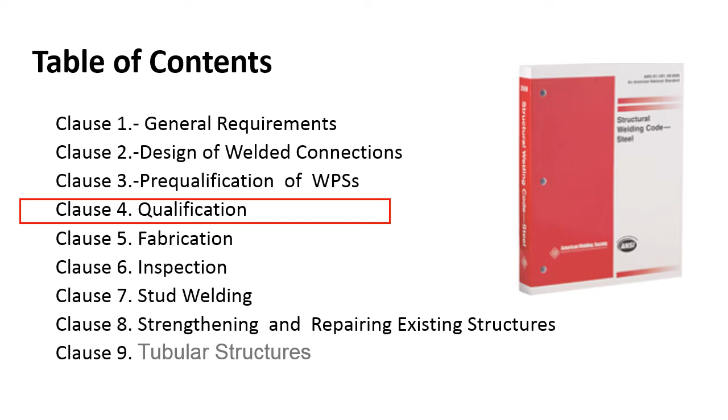Clause 4 is qualification, and this is the second part of it. We're going to keep slogging through qualification, covering WPS this time around, and some of the testing required and how to read some of the tables included in clause 4 for weld procedure qualification.

The PQR combines all the information of the WPS and adds the test results to provide a complete document that certifies the welding specification. It tells everybody what we did, how we did it, when we did it, the date, time, everything. This document is also required by all codes unless you are qualifying under the American Welding Society specifications. Under certain conditions, the WPS may be considered pre-qualified, in which the PQR is not required. So that's where we're headed in this episode.

In the next episode, we'll talk about needing a PQR. But right now we're talking about pre-qualification.

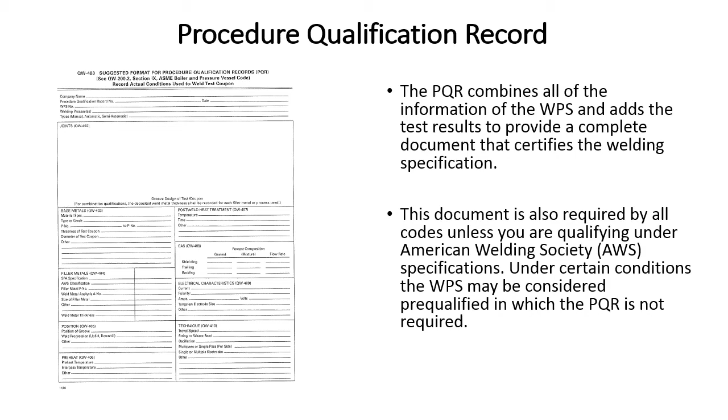If you like this format, you can use it. If you don't like this format, you can invent your own. Most codes have a suggested format, but if you've got one that you like, run with it.

I worked for a company years ago, and theirs was all written out. We did a lot of ASME work, American Society of Mechanical Engineers, so we just had everything typed out and addressed in paragraph form. Didn't look anything like this. It looked like a book report or something. But it worked, our clients liked it. Everything was addressed. We had a couple little sketches on there, maybe a table or two, but that's what it looked like. This is what a welding procedure specification looks like.

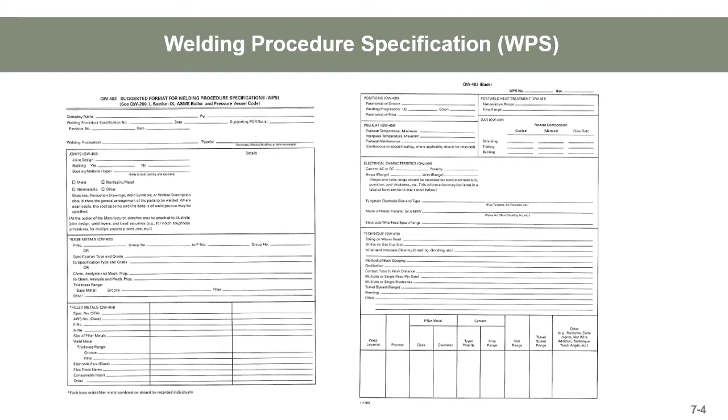Even though we're not going to be talking really about procedure qualification records in clause 3, you need to know what we're talking about so that you know what we're not talking about when we're not talking about it. So this is a procedure qualification record.

There's information there for bend tests, tensile tests, and then you put down all the information on the left-hand side: voltages, amperages, filler metals used, base metals, a sketch of the joint, whatever pertinent information you're going to need. Then you're going to take this, type it up, add your tensile test, your bend test, your toughness test, whatever is prescribed by that particular code, and then you're going to bundle that all up, give it a number, a PQR number, and that's what you're going to have.

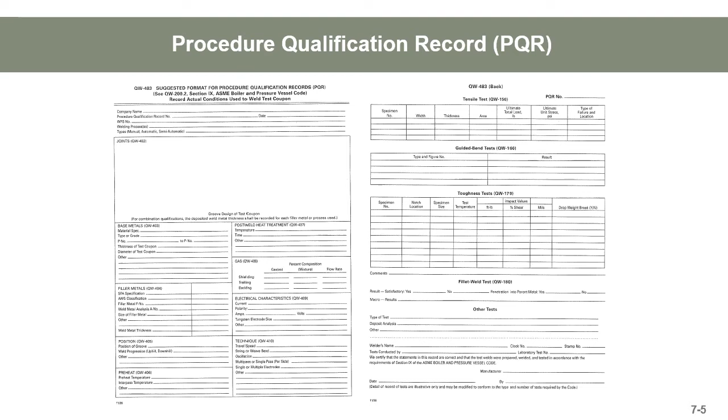That'll be your procedure qualification record that will support your welding procedure specification.

PQR content, what goes on a PQR? Generally, any supporting documentation: material specifications, electrode specifications, shielding gas specifications, all required testing, non-destructive and destructive. These tests typically include X-ray examinations, ultrasonic, tensile testing, bend testing, and when required, impact testing. All this stuff gets bundled up into a PQR.

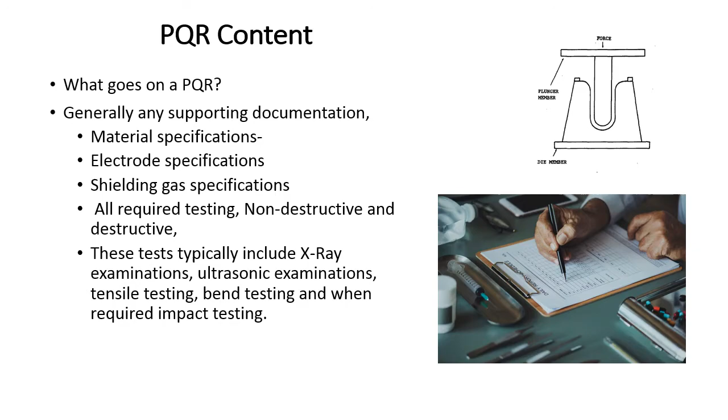Like anything we do with any of these codes, you need to realize there's a wall between welding procedure specification qualification, WPSs and PQRs. They're on one side of the wall. And on the other side of the wall, we've got performance qualification, which is qualifying the welder.

So right now we're going into Part B, which is Welding Procedure Specification Qualification, WPSs. We are not talking about qualification of people. We'll do that in the next edition of this podcast, YouTube video series, whatever we got going on here.

So we need to respect the wall. A lot of times a guy will be digging through Part C and say, oh my God, I got to do this for my WPSs. You got to respect the wall. You got to realize if you're dealing with the welding procedures, that's in one area of the code, Part B. Part C is performance. So just keep this in mind.

One of the basic tenets of these welding codes is we don't get on the other side of the wall. We stay in our swim lanes. If we're doing procedures, we do procedures. We don't dabble and read something out of the performance side or vice versa.

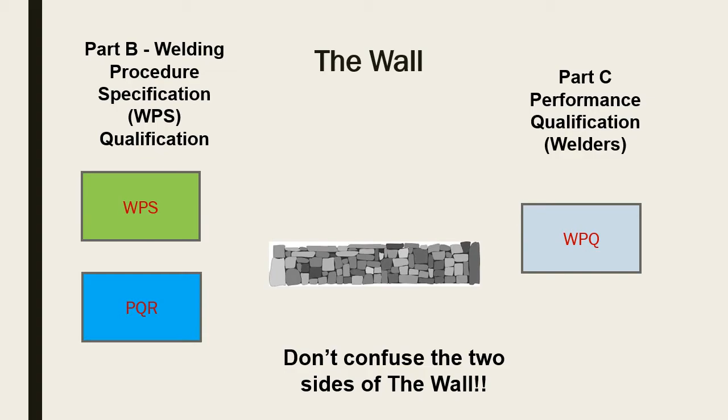Part B, Welding Procedure Specification, WPS Qualification.

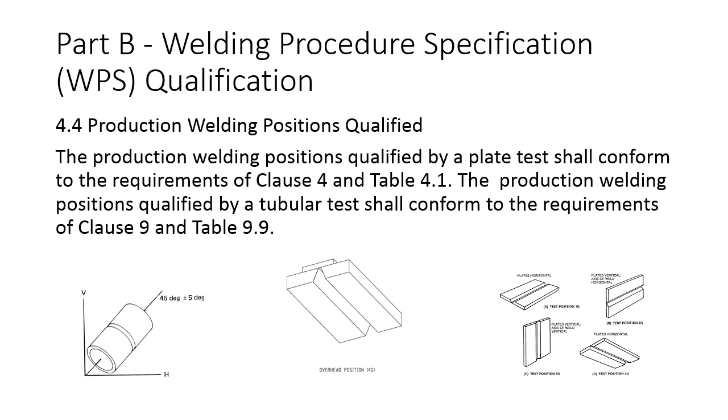4.4, Production Weld Positions Qualified. The production weld positions qualified by plate test shall conform to the requirements of Clause 4 and Table 4.1. The production welding positions qualified by tubular tests shall conform to the requirements of Clause 9 and Table 9.9.

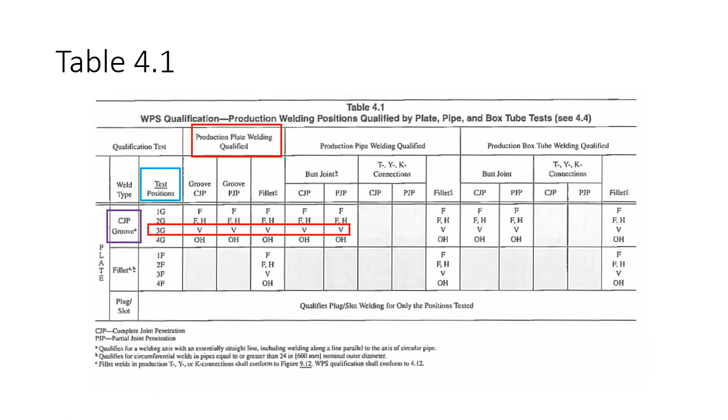4.5, types of qualification tests. The type and number of qualification tests required to qualify a WPS for a given thickness, diameter, or both shall conform to Table 4.2, complete joint penetration, Table 4.3, partial joint penetration, or Table 4.4, fillet.

Details on the individual NDT and mechanical test requirements are found in the following subclauses. So it's going to tell us to chase, if we're doing complete joint penetration, we've got to go to Table 4.2.

But each one of these subclauses is going to tell us, okay, 4.91 is going to tell us how to do visual inspection. 4.92 is going to tell us what we need for NDT. 4.931 is going to tell us face, root, and side bend tests required. 4 is going to tell us the reduced section tension tests are required. 5 is going to tell us all weld metal tension tests are required. And 6 is going to tell us which macroetch is required.

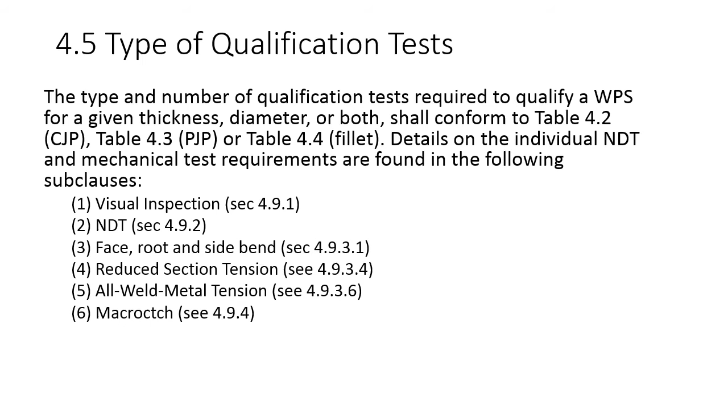So you just got to do a little digging and reading to see what is required for your particular joint configuration, because the testing required for a fillet weld is not going to be the same as required for a partial joint penetration weld or a complete joint penetration weld. You just got to do some digging and reading and develop some familiarity with these tables and these subclauses if you're going to qualify weld procedures.

Table 4.2 tells us, okay, so for WPS qualification, complete joint penetration groove welds, the number and type of test specimens and range of thickness and diameters qualified.

So we're going to start with that blue square I've got under nominal plate thickness. Let's say our test plate is 1.25 inches. So we go to there, our test plate's 1.25 inches. It's going to tell us the red square or rectangle of over number of specimens is going to tell us, okay, we got to do 2 reduced section tension tests. So we've got that right there.

That's kind of a cheesy picture, but I pulled it out of a military manual. So we got to do 2 tensile tests, and then we don't have to do any root bends or face bends because the material's too thick. So we're going to do side bends, 4 side bends. And there's a picture with our 4 side bend test specimens there.

And then under the purple, it tells us the nominal plate or pipe or tube thickness that we're qualified for. So we can weld everything between 1/8 of an inch and unlimited. That's how you read that table.

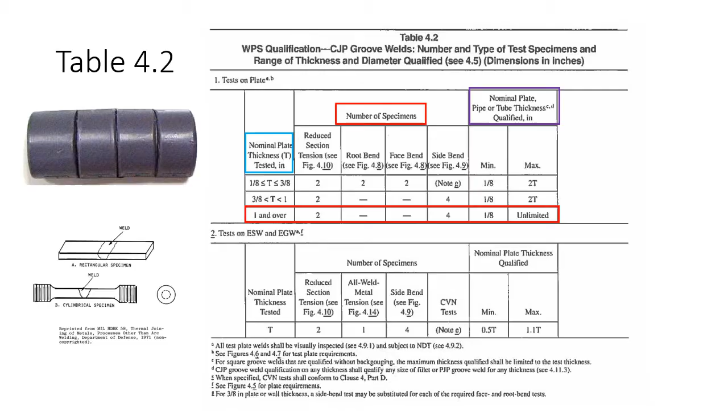4.6, weld types for WPS qualification. For the purpose of WPS qualification, weld types shall be classified as follows: complete joint penetration groove welds for non-tubular connections, partial joint penetration groove welds for non-tubular connections, fillet welds, complete joint penetration groove welds for tubular connections, partial penetration groove welds for tubular T, Y, and K connections and butt joints, and plug and slot welds.

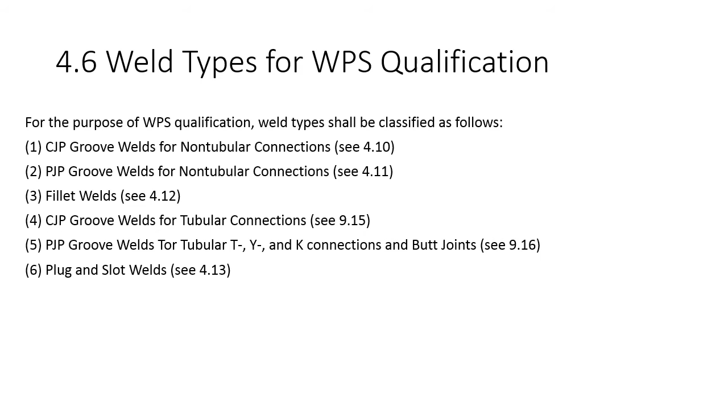Generally, I've just dealt with complete joint penetration groove welds for ASME or AWS D1.1. But here are the 6 types. I'm not going to show a picture for all 6, but a complete joint penetration groove weld is pretty self-explanatory. Partial penetration groove welds for non-tubular connections, I'll show those two on another slide.

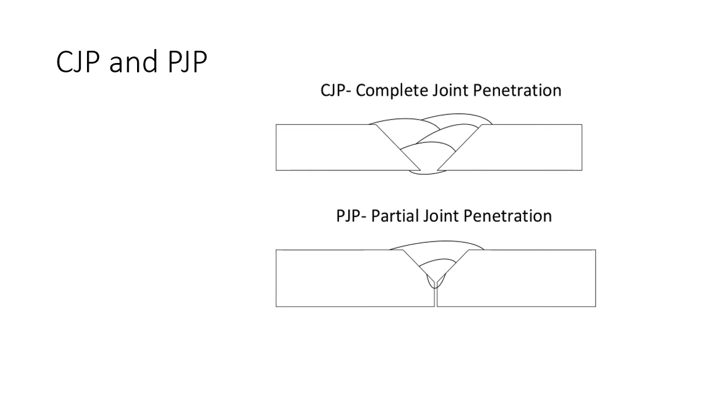Here's what we're talking about when we talk about complete joint penetration and partial joint penetration groove welds. A complete joint penetration groove weld is a weld in which the weld goes through the thickness of the base material. A partial joint penetration weld only goes some percentage, some fraction of the way into the base material. There's no 100% weld that is equivalent to the base metal thickness. I don't know if I explained that very well, but there's the pictures. You guys can get an idea of the difference between complete joint penetration and partial joint penetration groove welds for non-tubular situations.

Preparation of a WPS. The manufacturer or contractor shall prepare a written WPS that specifies all the applicable essential variables referenced in 4.8. The specific values for these WPS variables shall be obtained from the procedure qualification record, the PQR, which shall serve as the written confirmation of a successful WPS qualification.

So like I've said before in a couple of different YouTube videos, the PQR is our test. We run our tests, we do our test samples, some bends, some tensile pulls, or whatever the code requires for that specific joint configuration. Then we take that information, put it on a PQR, and the PQR supports our WPS. That's the basis of most of these codes: you've got a WPS that is supported by a PQR where you did some testing that says, yep, this is how we're going to do it, and the WPS is the recipe.

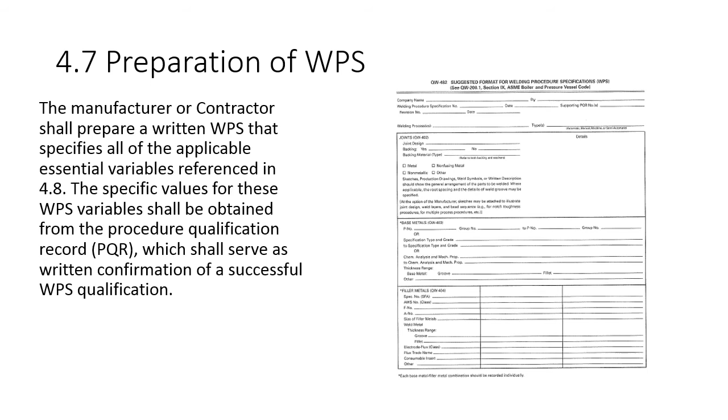4.8.3 Base Metal Qualification. WPSs requiring qualification that use base metals listed in Table 3.1 shall qualify other base metal groups in conformance with Table 4.8. WPSs for base metals not listed in 3.1 or Table 4.9 shall be qualified in conformance with Clause 4. The use of unlisted base metals shall be approved by the engineer.

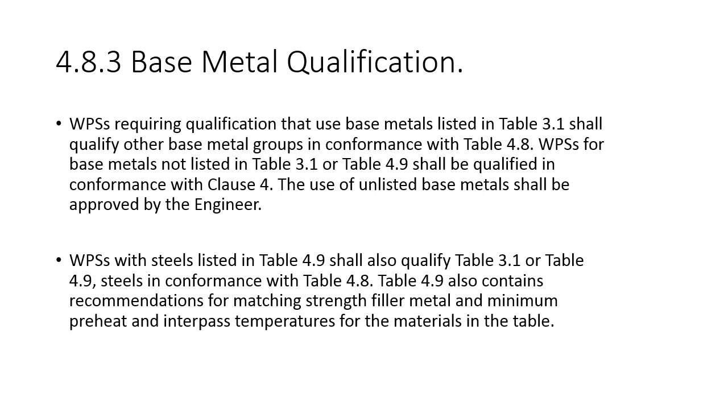WPSs with steels listed in 4.9 shall also qualify Table 3.1 or Table 4.9 steels in conformance with Table 4.8. Table 4.9 also contains recommendations for matching strength filler material and minimum preheat and interpass temperatures for the materials in the table.

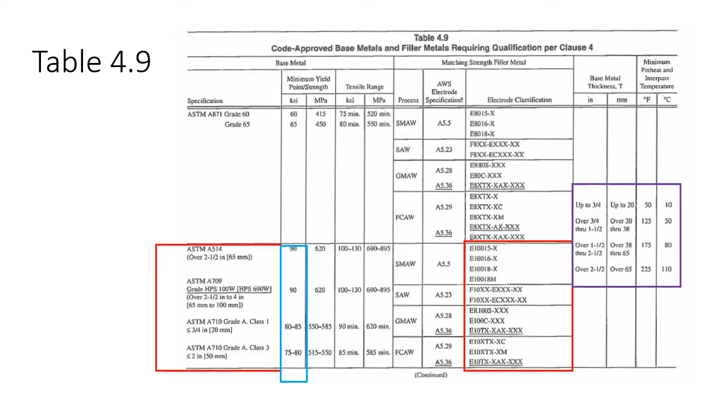I would just go and qualify my group 2 steel to a group 2 steel, and then I've got group 1 to group 1, group 2 to group 1, and group 2 to group 2. So that's some of the nuances you need to learn as you dig around in this code.

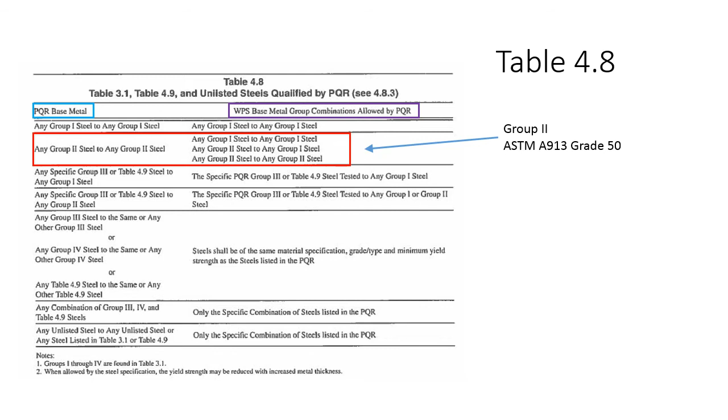4.8.4 Preheat and Interpass temperature. The minimum preheat and interpass temperature should be established on the basis of steel composition as shown in Table 3.1. Alternatively, recognized methods of prediction or guidelines such as those provided in Annex H or other methods may be used. Preheat and interpass temperatures lower than required per Table 3.3 or calculated per Annex H may be used provided they are approved by the engineer and qualified by WPS testing.

So this lays out how you need to address preheat. You go to Table 3.1 and it's going to tell you what your preheats need to be, and then there's some guidelines in Annex H, and other methods you can use to calculate it.

If your preheat temperature is lower than required on Table 3.3 or calculated in Annex H, you need to prove to the engineer by qualification that we've done this, we can weld this metal with this preheat, and the engineer's got to approve it. If the engineer doesn't like what you're doing, you got to do what the engineer says you need to do.

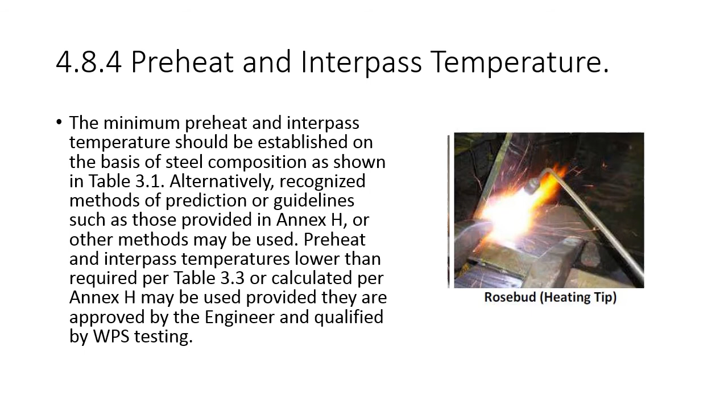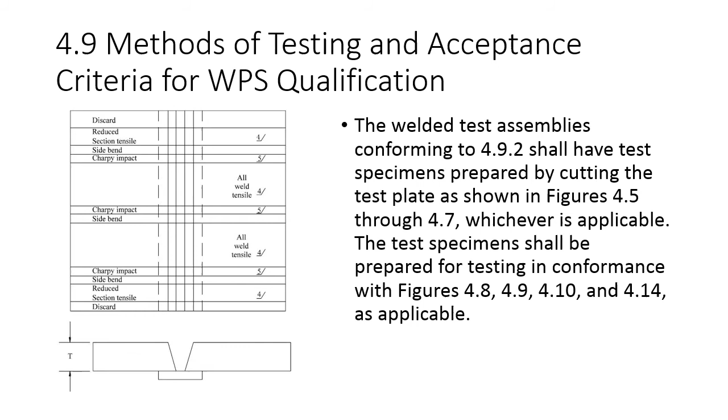The welded test assemblies conforming to 4.9.2 shall have test specimens prepared by cutting the test plate as shown in figures 4.5 through 4.7, whichever is applicable. The test specimens shall be prepared for testing in conformance with figures 4.8, 4.9, 4.10, and 4.14 as applicable.

Visual inspection of welds. The visual inspection or acceptance criteria for the qualification of groove and fillet welds, excluding weld tabs, shall conform to the following requirements as applicable. So for groove welds, they'll meet the following requirements.

Any crack shall be unacceptable regardless of size. Welding cracks are not good. Any crack, you got to repair it. All craters need to be filled to the full cross section of the weld. Weld reinforcement shall not exceed 1/8 of an inch. The weld profile shall conform to figure 5.4 and shall have complete fusion. Can't have any undercut to exceed 1/32 of an inch. From what I was told, that's about your fingernail. If you can catch your fingernail on it, it's too much undercut.

Weld root for complete joint penetration groove shall be inspected and shall not have any cracks, incomplete fusion, or inadequate joint penetration. So this is what lays out your visual inspection for welds.

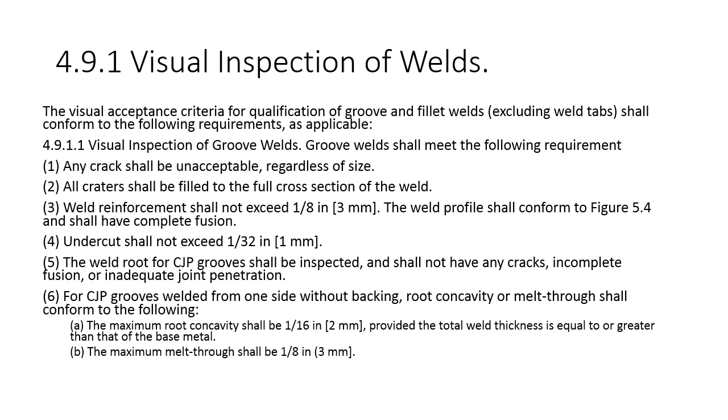For groove welds, 4.9.1.1 is groove weld inspection criteria. 4.9.1 Visual inspection of welds. 4.9.1.2 Visual inspection of fillet welds.

Fillet welds shall meet the following requirements. Any crack shall be unacceptable, regardless of size. All craters shall be filled to the full cross-section of the weld. The fillet weld leg sizes shall not be less than the required leg sizes. Fillet weld profile shall meet the requirements of figure 5.4. Base metal undercut shall not exceed 1/32 of an inch.

So our visual weld inspection for groove welds and fillet welds, there's a lot of commonality here. Cracks are unacceptable—little cracks, big cracks, they're all unacceptable. You got to fill in the craters. The profile needs to meet the requirements of figure 5.4, which you got to follow those directions. And the base metal undercut shall not exceed 1/32 of an inch.

I was taught that a 32nd of an inch is if you can catch your fingernail on it, it's too much undercut. If you can't catch your fingernail on it, then it's good to go. That's a 32nd, is the measurement that I was taught.

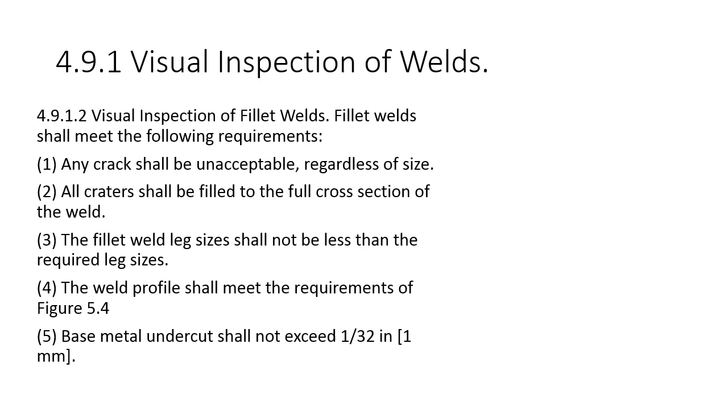4.9.2 NDT. Before preparing mechanical test specimens, the qualification test plate, pipe, or tubing shall be non-destructively tested for soundness. Either RT or UT shall be used. The entire length of the weld in test plates, except for discard lengths at each end, shall be examined in conformance with Clause 6, Part E or F, and Clause 9, Part F for tubulars. For acceptable qualification, the weld as revealed by RT or UT shall conform to the requirements of Clause 6, Part C, or Clause 9, Part F for tubulars.

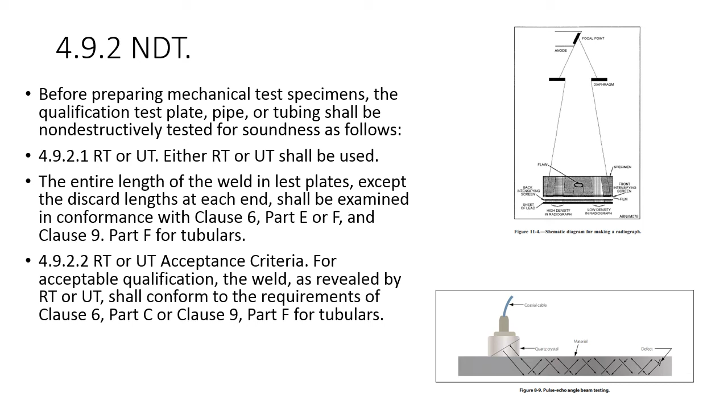So this is a little different than ASME Section 9, which doesn't just right off the bat ask you to do NDE. This one asks you to do NDE. Depending on what you're doing, you can just do a couple of bends and a couple of tensile tests, and you're good to go.

Each specimen shall be bent in a bend test jig that meets the requirements shown in figure 4.11 or 4.13, or is substantially in conformance with those figures, provided the maximum bend radius is not exceeded. Any convenient means may be used to move the plunger member with relation to the die member. I took this one out of ASME Section 9, and I'm pretty sure they're pretty close to being the same. I don't know what the nuances are, if there's any difference, but notice it says 'or is substantially in conformance with those figures.' I think that means if you're pretty close, you can use the same type of bend test jig. This is what they look like, and it's all mapped out if you want to build your own.

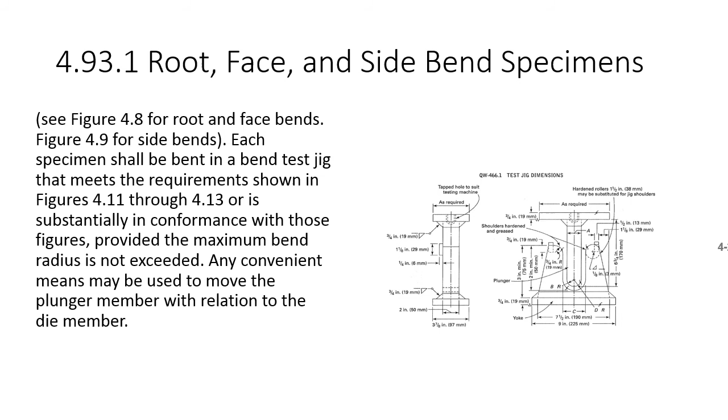When material combinations differ markedly in mechanical bending properties, as between two base materials or between the weld metal and the base metal, longitudinal bend tests, face and root, may be used in lieu of the transverse face and root bend tests. The welded test assemblies conforming to 4.9.2 shall have test specimens prepared by cutting the test plate as shown in figure 4.6 or 4.7, whichever is applicable. The test specimens for the longitudinal bend tests shall be prepared for testing as shown in figure...

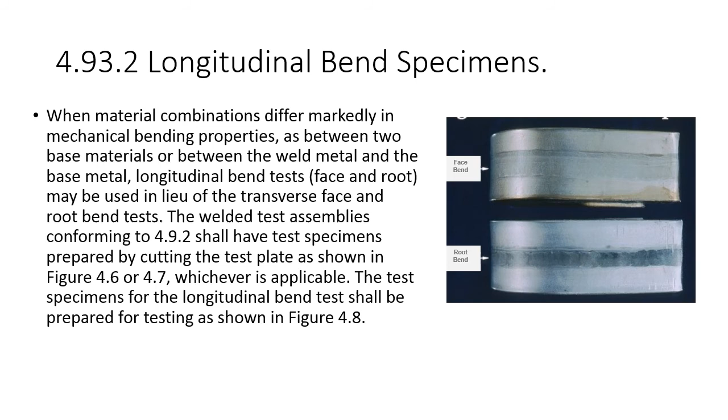4.9.3.3 Acceptance criteria for bend tests. The convex surface of the bend test specimen shall be visually examined for surface discontinuities. For acceptance, the surface shall contain no discontinuities exceeding the following dimensions: number one, 1/8 inch measured in any direction on the surface; number two, 3/8 inch as the sum of the greatest dimensions of all discontinuities exceeding 1/32 inch but less than or equal to 1/8 inch.

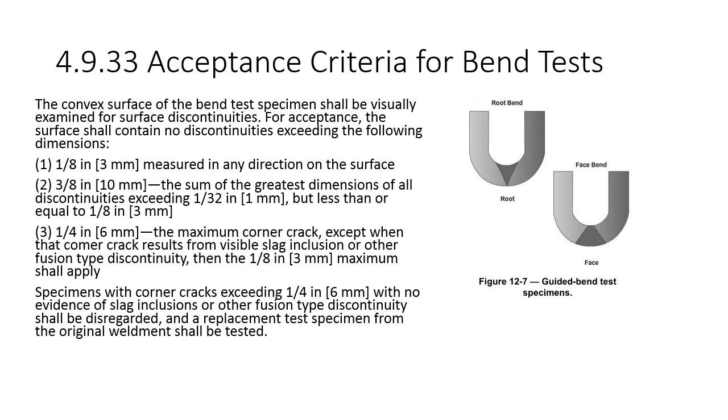Number three, 1/4 inch is the maximum corner crack, except when the corner crack results from visible slag inclusions or other fusion type discontinuities, in which case 1/8 inch maximum shall apply. So if you've got specimens with corner cracks exceeding this with no evidence of slag inclusions, you can disregard them -- maybe you didn't grind a good enough radius on it or whatever. This is where you find your acceptance criteria for bend tests. It's pretty self-explanatory -- you read through it, do your bend tests, look at it, go down through it 1, 2, 3, and make your judgment on this criteria.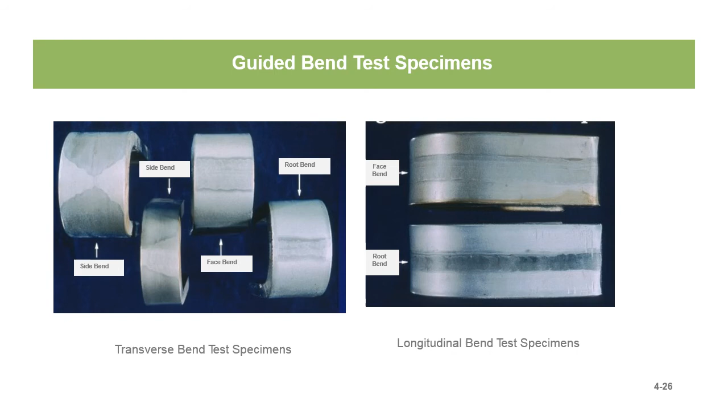Here's some transverse bend specimens and longitudinal bend test specimens. You can see it gives you an idea of the difference between the two types. We've got side bends and face and roots, as opposed to just a face and a root. So just some compare and contrast between transverse bend tests and longitudinal bend test specimens.

Macroetch test. The weld test specimen shall be prepared with a finish suitable for macroetch examination. A suitable solution shall be used for etching to give a clear definition of the weld. This is an example of a macroetch that I pulled up. You can see they've taken a slice through the weld. It's not a fillet weld per se, but it gives you an idea of what's going on. Then you spray a solution on there, sometimes an acidic solution, usually cut with alcohol or something like that, and you leave it on there for an amount of time. Usually you polish it -- hit it with some fine sandpaper, a sanding disc or something, to get it polished.

And then you hit it with an acid that's been cut with an alcohol. You can find some examples on the internet of how to do this. It'll bring out the weld and show you where the weld is in the heat affected zone, giving you an idea of what happened in the weld. Then you go from there, clean it off, and maybe put some hairspray on it to preserve it.

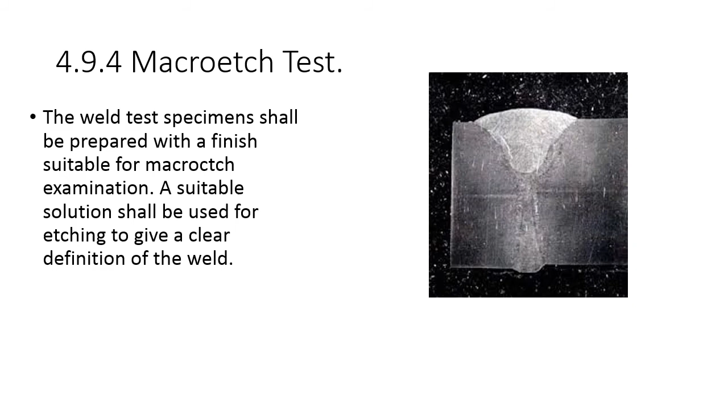Then you make your decision based on the criteria of the welding code. Did this weld? Did we do it right? Did we get enough penetration? Do we like what we're seeing? Whatever it is, you make a judgment call from there based on the criteria and code requirements.

If any one specimen of all those tested fails to meet the test requirements, 2 retests for that particular type of test specimen may be performed with specimens cut from the same WPS qualification material. The results of both test specimens shall meet the test requirements. For materials over 1.5 inch thick, failure of a specimen shall require testing of all specimens of the same type from 2 additional locations in the test material.

So if you run a test and you have one bend test go bad on you, and the material's less than 1.5 inches thick, you can cut 2 more bend tests, and if those pass and you document it, you're good to go. Or if you have one tensile test that doesn't go your way, there's some ways around this.

So sometimes when you're doing a WPS test sample, you don't want to minimize the amount of material you've got to work with, because if something goes wrong, you have to start all over if you don't have enough material to cut another tensile or another bend test sample. So generally I'll look at the minimum I need, and then throw in a little extra material just in case.

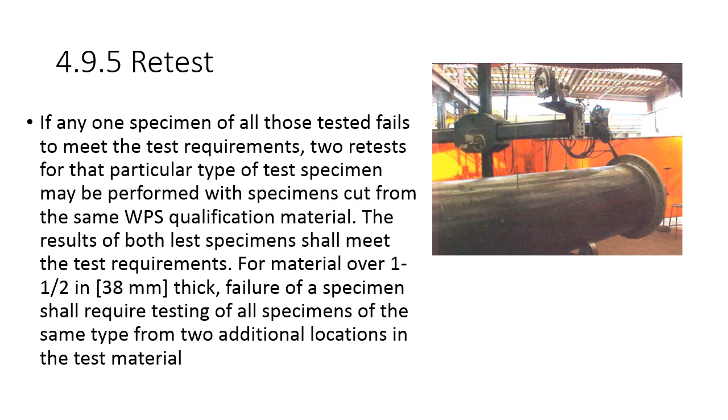4.10, complete joint penetration groove welds. See Table 4.2 for the requirements for qualifying a WPS of a CJP weld on non-tubular connections, and Figures 4.5 through 4.7 for appropriate test plates.

4.10.1.1, corner or T-joint test specimens: for groove welds in corner or T-joints shall be butt joints having the same groove configuration as the corner or T-joint to be used in construction, except the depth of the groove need not exceed 1 inch.

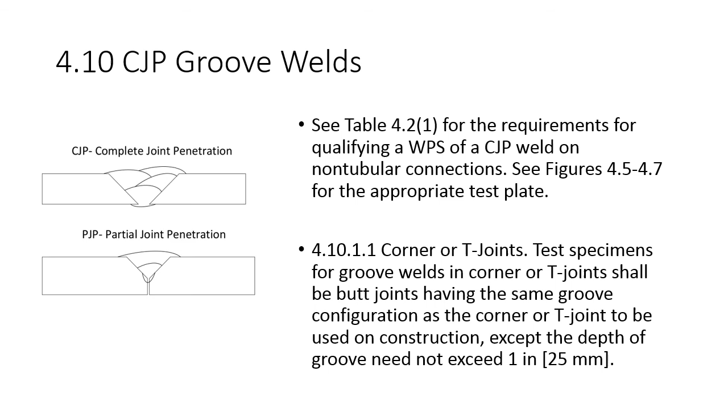Welding processes requiring qualification: gas tungsten arc welding, gas metal arc welding short circuiting, electro slag welding, and electro gas welding may be used, provided the WPSs are qualified in conformance with the requirements of Clause 4.

WPS requirements for gas metal arc welding, short circuiting: prior to use, the contractor shall prepare a WPS and qualify each WPS in accordance with the requirements of Clause 4. The essential variable limitations in Table 4.5 for GMAW shall also apply for GMAW-S.

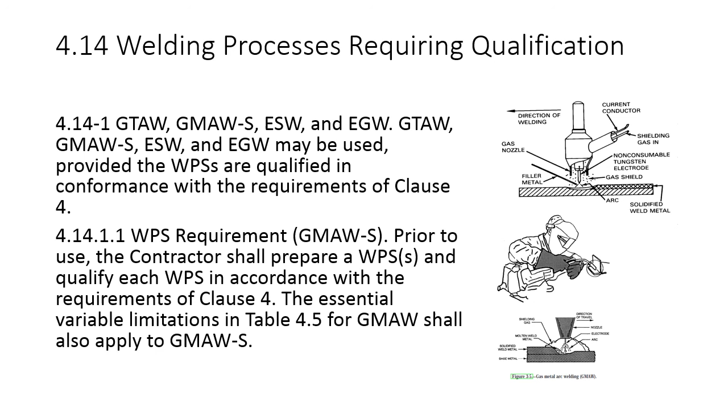Any questions in regards to this YouTube video? We covered Clause 4. We talked about bend tests, tensile tests, how to read some of the tables, some of the nuances involved in qualifying a weld procedure to AWS D1.1. We covered welding positions and how they play into the tables, and some of the materials you can use.